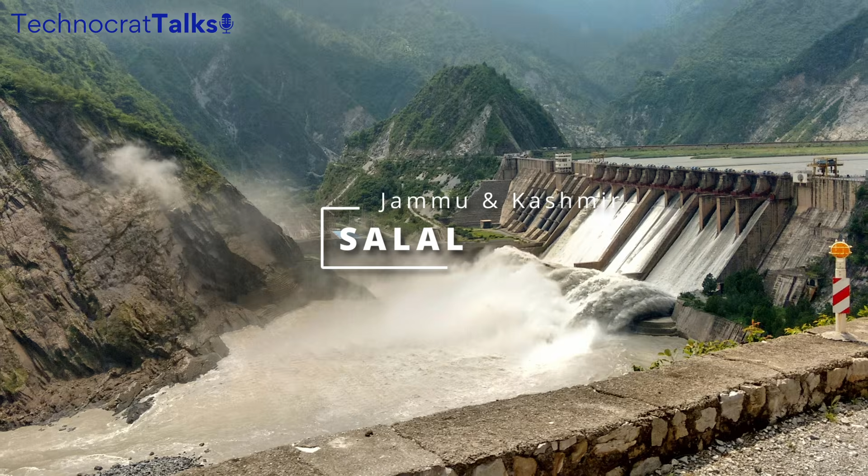Likewise, I had worked on several other hydropower tunnels. To name a few, Salal hydropower project in Jammu Kashmir, then Chamera stage 1 in Himachal, Dhauli Ganga stage 1 hydropower project in Uttarakhand, and many more. So my job is of a geologist. We help the tunneling industry on two accounts.

One, during the investigations. Investigations means that we have to plan a techno-economically feasible route for a tunnel. And we should bring out the geological details of the area through which the tunnel is to be constructed, so that engineers can plan the layout. They should design the tunnel according to the geological details. And then the construction planning is also done according to the geology of the area. Because you can't construct any tunnel by any method in any part of the world. It all depends upon the geology of the area, that you have to choose the tunneling method also.

So, first of all, what is a tunnel? Tunnel is an underground route or passage driven through the ground without disturbing the overlaying ground.

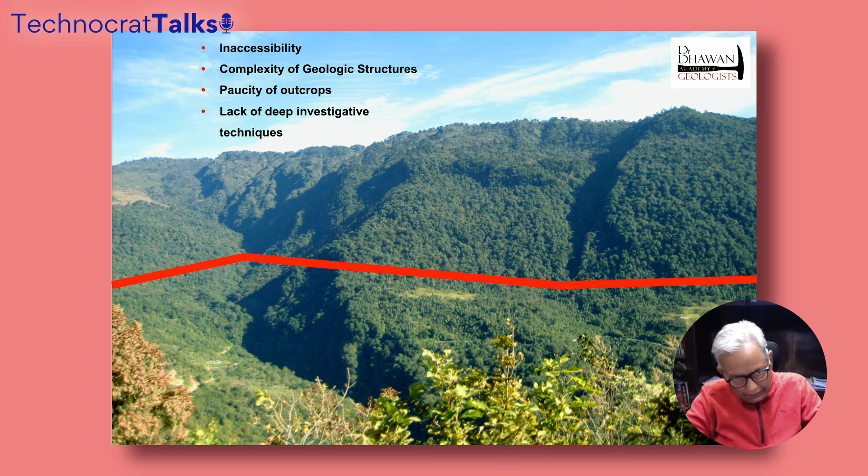With these sets of problems, we have to estimate which alignment will be better, and along the final alignment, what type of geological formations will be encountered when we construct the tunnel, and what sort of preparation we are required to do. So that's a challenge. Similar challenges must have been faced by people who conceived the alignment of Silkyara tunnel and have been constructing this tunnel.

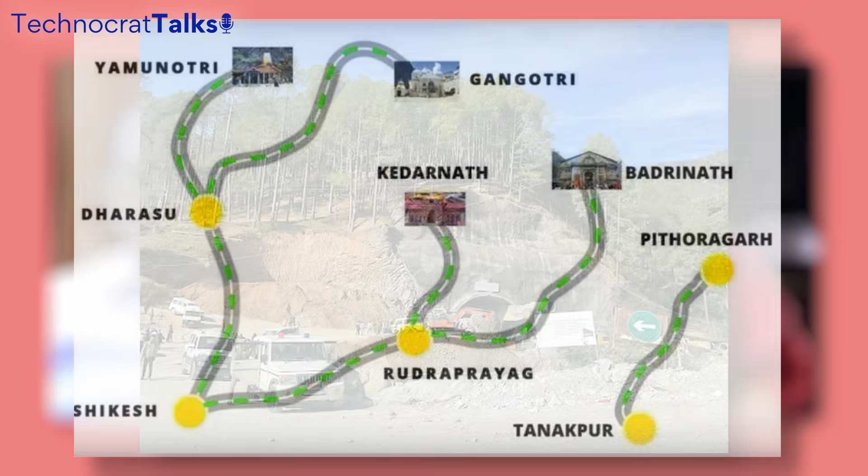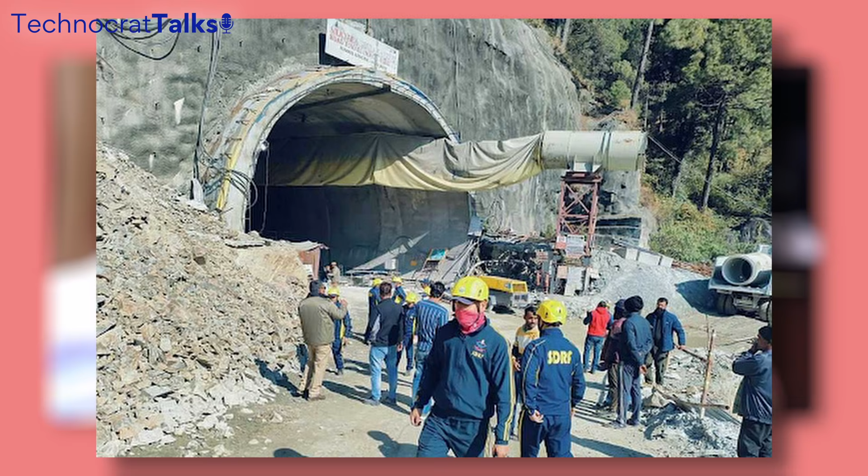As far as Silkyara is concerned, this is a 4.5-kilometer long tunnel. It's a part of Chardham Mahamarg Pariyojana, which envisages construction of 900 kilometers of highway, and there are several tunnels wherever road construction is difficult or routes are circuitous. So for reducing the distance and for stability, and wherever slopes are not stable along the roadside, tunnels are being constructed.

And this Chardham has been conceived by Government of India to connect the four holy towns, Yamunotri, Gangotri, Kedarnath, and Badrinath, through the road network. A railway project is also under construction, known as the Rishikesh Karnaprayag project. So this Silkyara was planned for connecting Yamunotri. And as I told you, this is a 4.5-kilometer long tunnel. It's a 2-lane bi-directional tunnel between Silkyara Bend and Barkot.

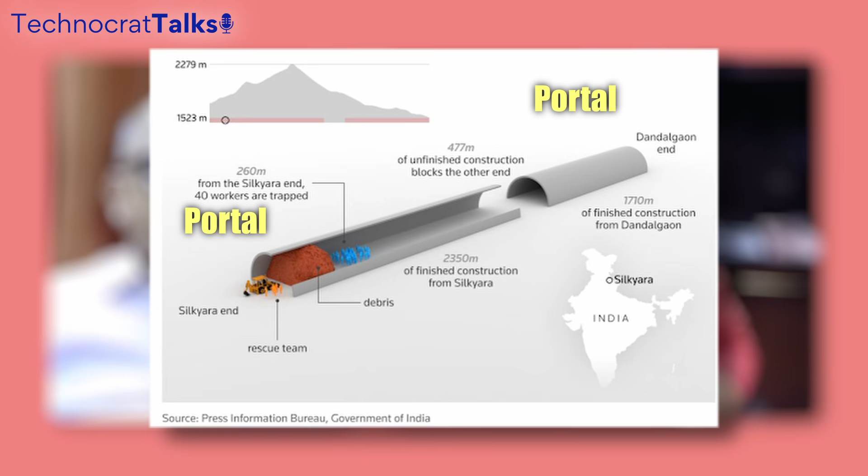These are the two ends of the tunnel, and in technical jargon, these entry points and exit points are known as portals. So I'll be using this term portal in my subsequent discussion. It will be a part of NH 134 in Uttarakhand. The project has been planned by MORTH, Ministry of Road, Transport and Highways, through NHIDCL, and Messrs. Navyuga Engineering Company are the contractors of this tunneling project.

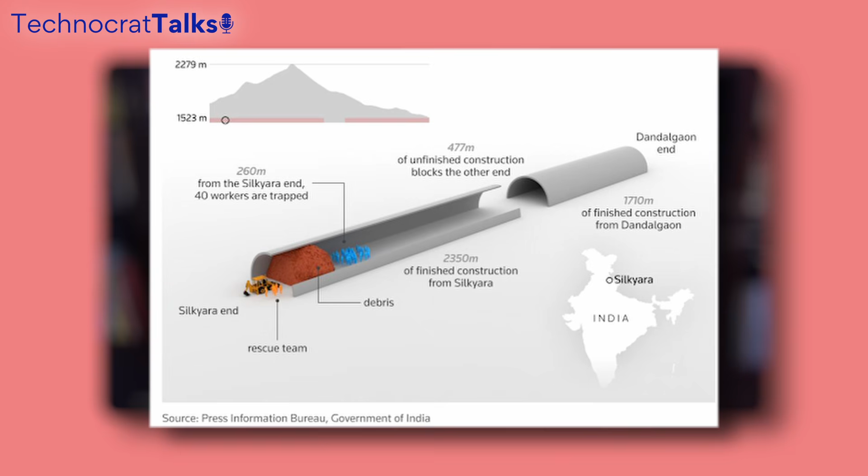Because this is an EPC mode project, the design is under the responsibility of the EPC contractor. This 4.5-kilometer long tunnel was under construction from two ends, Silkyara end and Dandalgaon end, which is also known as Barkot end. So these are the two portals. In between, about 477 meters of excavation was remaining. From the Silkyara end, on 12th of November, a big collapse was noticed and workers got trapped.

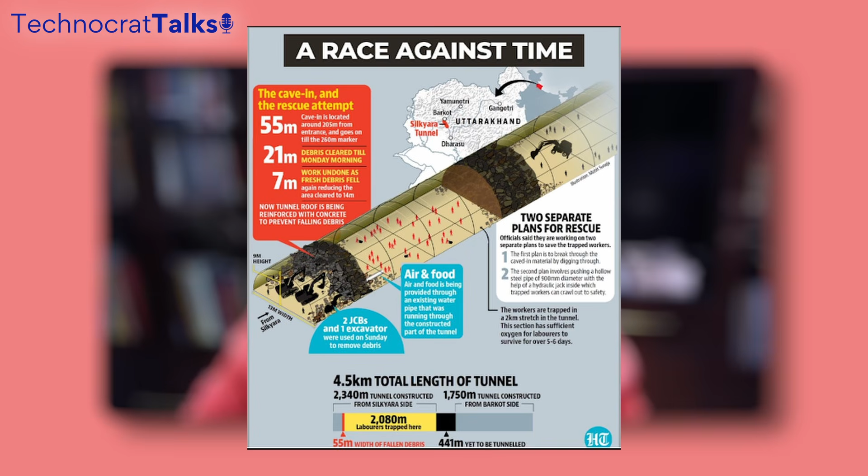You will see in the next picture that there is a rock plug in between these two portals, which is 477 meters. And at about 205 meters, the collapse occurred, and these 41 workers got trapped. The initial report was of 40 people, and later on we came to know that the exact figure is 41.

Sir, any prima facie reason for that collapse that we know, or is it yet to be investigated? Yet to be investigated, but I will cover in my subsequent talk what the geological setup is which can lead to this kind of occurrence. So this is the physical situation where these 41 people were trapped.

On one side there was unexcavated rock mass between the two portals. The length of this rock plug was 477 meters. And then on the other side, from where they entered in their shift during the previous night, this collapse occurred, from chainage 205 to about 265. So it was a 60 meter wide mass of debris which came in the way, and these workers could not get out of it.

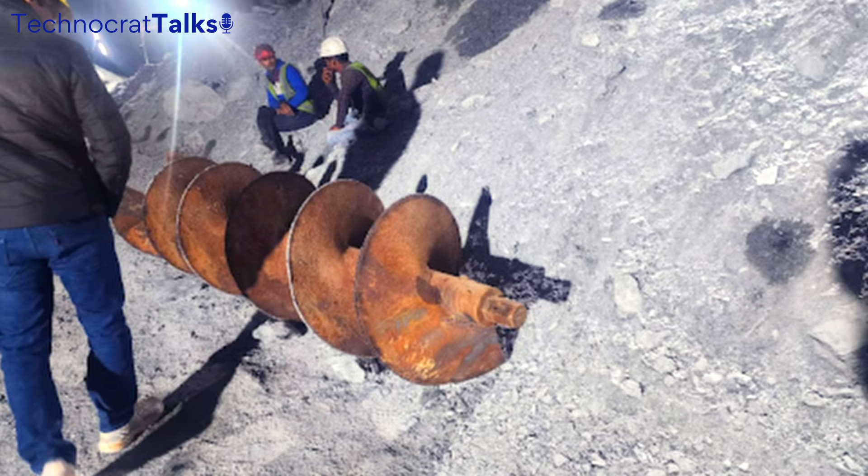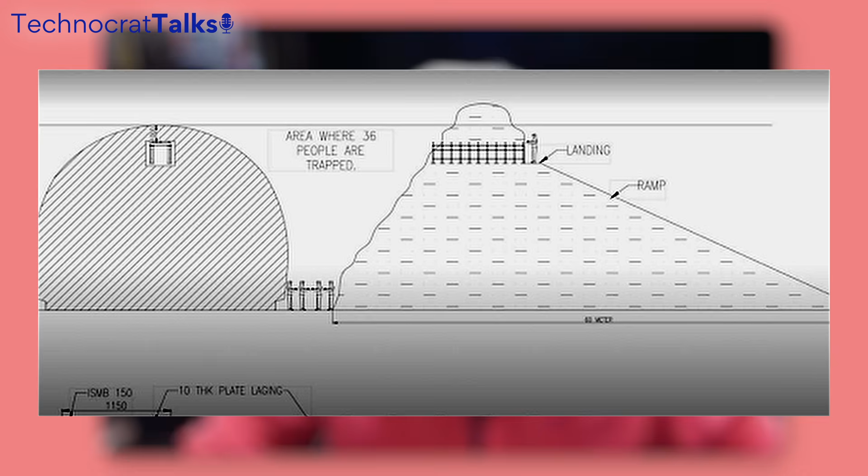It is just like a heap of sand. If you disturb the toe of the heap, then sand will slide down. So soon it was realized that this will not work. And therefore, rescue plan A was started. You can call it plan A initially. It was drilling of a horizontal rescue hole by an auger machine from the Silkyara end, because it was the best and safest alternative at that point of time.

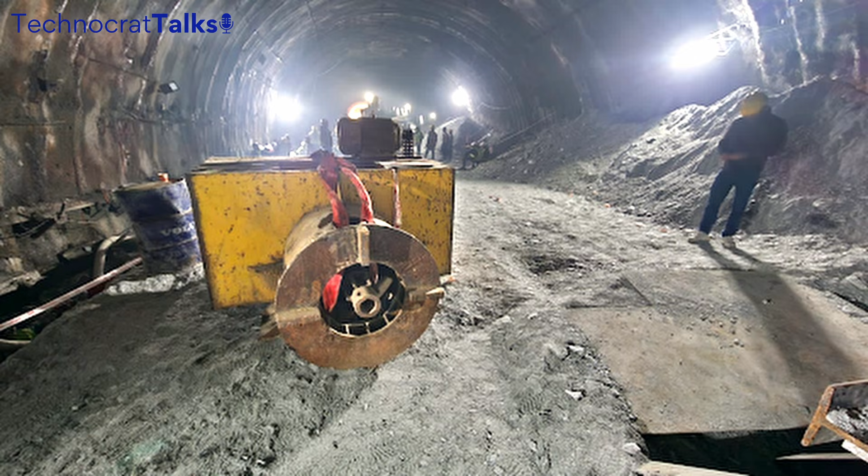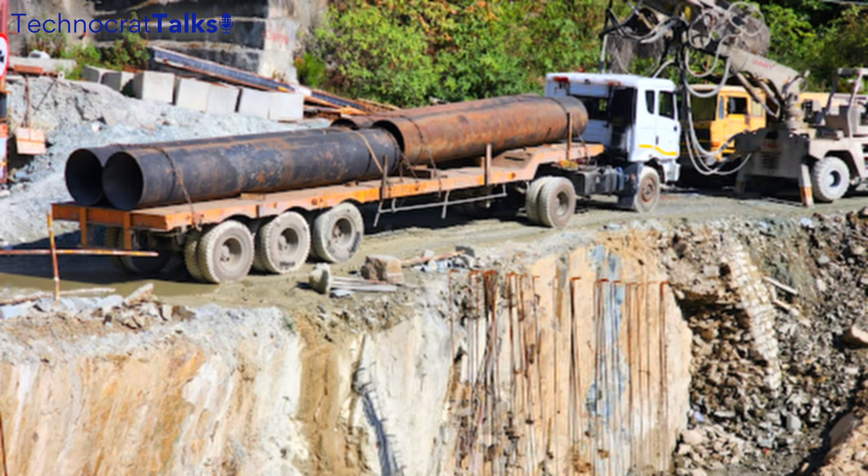So an auger machine which was locally available with the Uttarakhand Irrigation Department was brought, and pipes were also brought. You can see in the picture, pipes are loaded on a truck at the tunnel site. And initially, it was thought that they will drive 900 diameter pipes. After the auger does its job, simultaneously pipes will be pushed inside the hole by hydraulic jacking.

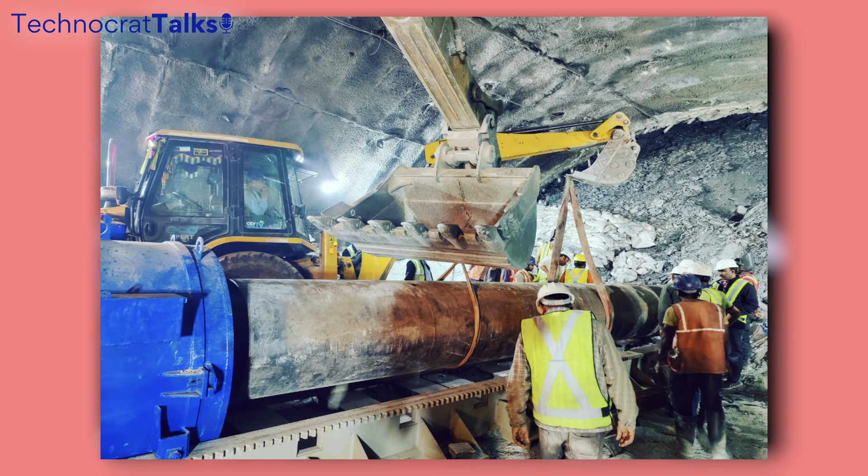But soon after they could go only a couple of meters, the auger machine broke down, and this rescue operation got suspended. So there was a panic at that time, but soon a decision was taken to bring new American auger drills. I think it was on 15th of November. And this machine was installed soon after, without losing time.

And all this I'm speaking out of the knowledge I have acquired through reports in the media and some technical information which I got through my friends who were working at site. I had not been to site, so this is a disclaimer from my side.

But after going for about 24 meters, the pipe got stuck. And then there was a real panic. And then the government ordered all agencies who have any experience in tunneling or rescue or mining that they should come, and several plans were discussed with them.

Initially, we had NDRF there, SDRF was there, NHIDCL was there, who is the owner of the project. Then Geological Survey of India also came. ONGC people came. SJVN, Satluj Jal Vidyut Nigam, they came. RVNL, who are doing very successful tunneling in the Rishikesh Karnaprayag line, their officers also came to site. RITES was there. In fact, all railway PSUs were instructed to reach at site.

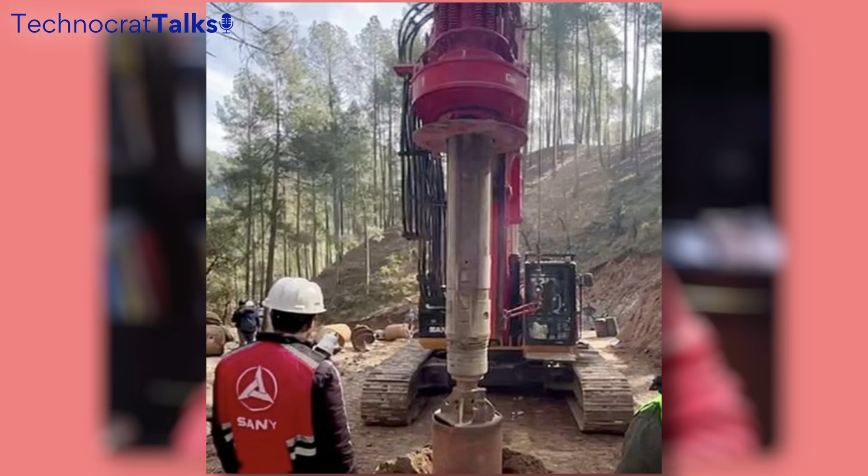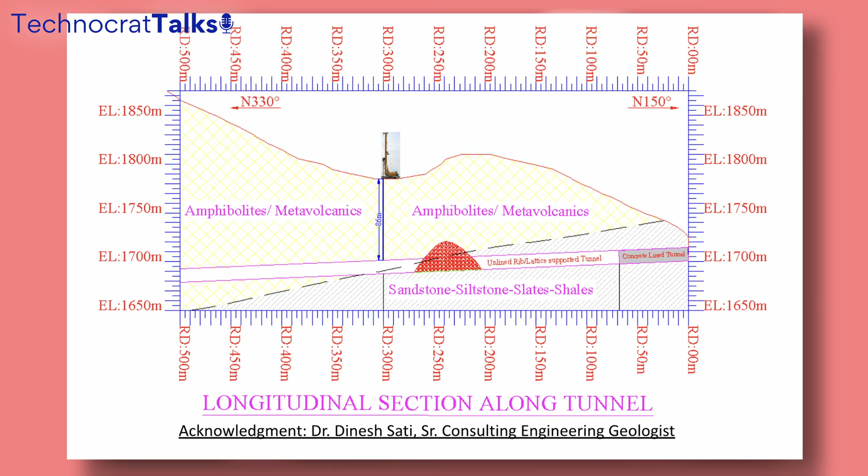Then at that stage, it was considered that as a plan B, a vertical hole will be driven from the top of the mountain, and through survey and geophysical estimation its locations were decided, and at the pre-decided location, after investigations, first of all, a small diameter hole was done, and then it was planned to have a big diameter hole. This responsibility was given to SJVN, but simultaneously, other rescue operation teams, they commissioned

the auger again, the American auger again, and the American auger did a very fast progress, and we were almost at the verge of a breakthrough. There was a lot of hope at that time that this operation will be successful. But all of a sudden, at around 55 meters, if I remember correctly, no, 53 meters, the auger broke down again.

And this time, the auger machine itself got totally consumed inside the hole. Its spiral blades got damaged. They were badly stuck, and the pipe was choked. Machine completely broke down, and it was beyond repair. So that was the second phase of a difficult time, but the rescue teams kept their morale high and got over all these difficulties. They first of all removed the components of the auger machine which were there inside the pipe.

I would try to explain the situation with help of this sketch. You see the hill topography, and you can also see the tunnel, which is shown by double line. And in between this tunnel, you will see a red color heap. This is the 60-meter wide collapse, heap of muck in form of a collapsed zone.

And this collapse consists of the rock debris, the broken parts of the supports, lattice girders, steel ribs, rock bolts, and other types of support elements which are mixed in the muck. And it is given to understand that two or three equipments were also buried in the muck. So these are the obstacles which came into the way when the auger machine got damaged, because the auger machine can handle the rocks.

It can cut through the rocks, it can cut through various types of natural debris, but it cannot cut the steel elements, or even if it is mass concrete, it will have difficulty. So therefore the blades of the auger got damaged.

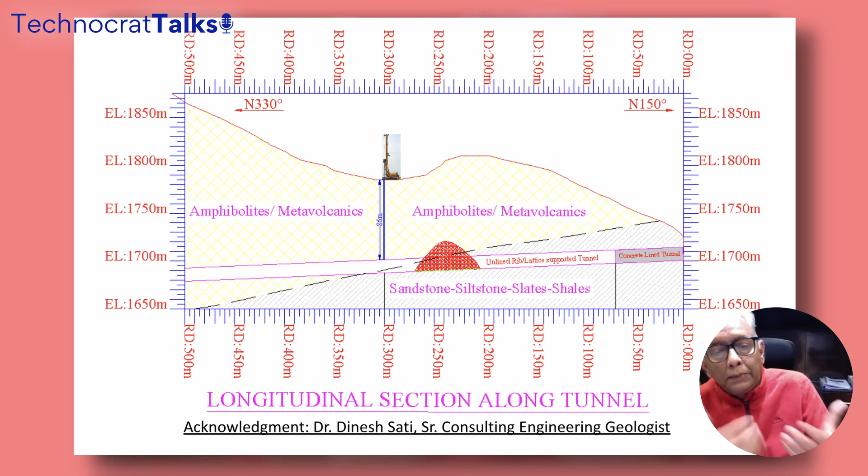Geologically, you will see that there is a contact between two types of rock formation. One is the amphibolites or metavolcanics, and the other type of rock below the tunnel is sandstone, siltstone, slates, shale. So these are the group of rocks. Because rocks are not uniform, these are the amalgamation or combination of various rock types. So these are the two rock types, and there's a dotted contact which is shown here.

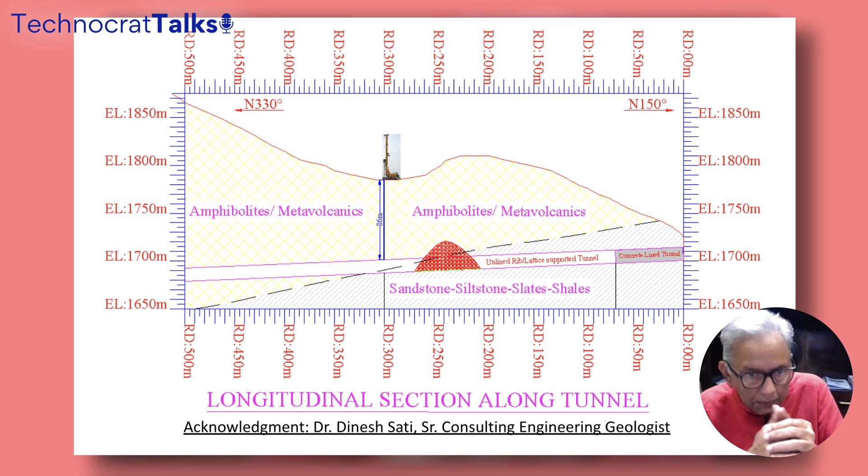This contact is said to be sheared. That there was a very weak zone along the contact. Maybe this was the root cause of the collapses, and we are told that during construction in 2019, when this tunnel was under construction, at that time also several cavities have taken place, and it was difficult to negotiate this part of the tunnel during initial construction.

You mean, sir, that layers may have become loose with respect to each other? Yes. If they are not supported properly, they will further become loose. They will exert load on the supports. Here, we are told that the support was by rock bolts, shotcrete, and lattice girders. Lattice girders are modern types of supports, which are placed to replace the conventional steel ribs. It is a part of NATM method of construction. So there is nothing wrong with this.

It is being done in several Himalayan tunnels, but it depends whether the support was enough or not, and if enough support was provided, what was the quality control. So it is all a matter of study. We really do not know what could be the reason, but geologically it is said to be a weak zone in which this tunnel was placed in this section.

Sir, some time back you have said a word metavolcanic. Does it indicate proximity to volcanic activity in the zone? This is all ancient. This is a result of some volcanic activity, but in historical time, not now. There is no recent volcanic activity. There's no sign of any. It's not a volcanic activity prone zone. So no, not at all. So, as I said, this is the geological setting of this area.

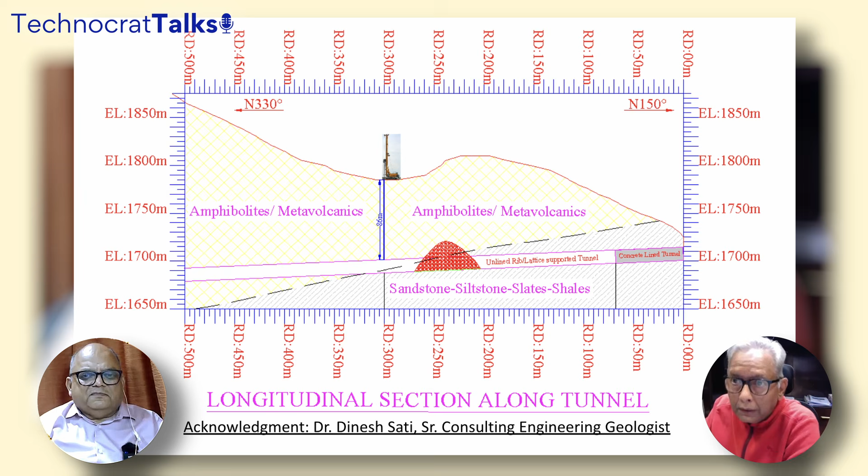So I will come back to plan A, wherein I have told that the auger machine was pressed into service, and at 53 meters it broke down again. Then the broken parts of the auger machine were brought out after gas cutting or plasma cutting. And then, because auger was the last option, and there were too many obstacles which the auger had seen, it was decided at that time that let it be done finally manually, and the remaining portion was hardly less than 15 meters or so.

And at that juncture, the rat miners were roped in as the last mile saviors, and they came out as true heroes who helped to negotiate the final 15 meter stretch out of the total 65 meters through the rubble. And they did it very fast. They took hardly 27 hours to negotiate the balance 15 meters, and they brought all the 41 trapped people out successfully.

So what do we call rat miners? I mean, what is that term? I'm sure many people will not know. So could you elaborate? Yeah. Actually, this is a term which is very common in the coal mining industry. And to tell you the truth, this is not a legally accepted mining term, it is colloquial. It was done before, but slowly, because it is very risky for the people who do it, and it is illegal. So it is not encouraged. Maybe unofficially or illegally, some people would be doing it.